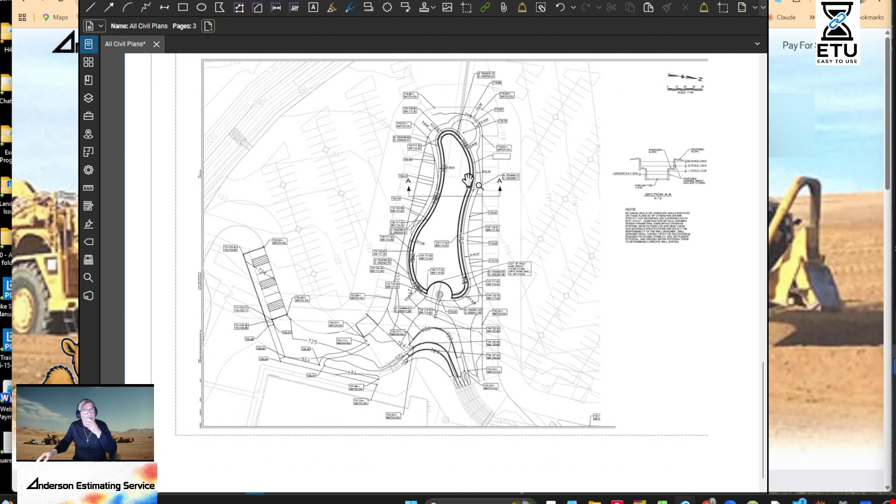We're gonna fix this stuff on the fly, but we're gonna do a little takeoff today. I've got this, and this is a little retaining wall, a double retaining wall. We don't have the structurals or anything, but we're just gonna figure it. We'll probably go 6 foot, 5 foot, and then a 1-to-1, maybe 5 foot 1-to-1, something like that. Might put a vertical in there. We'll see, we'll check it out.

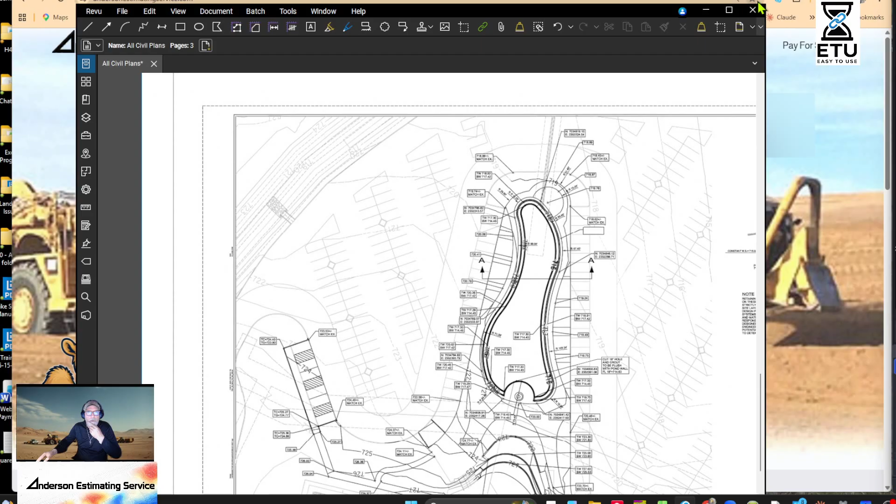And we got this sheet, and then we've got its companion. If I do it on the other side, sometimes windows, if I go up I know it's going to grab it, but if I go down it won't grab it. There we go, gosh darn it.

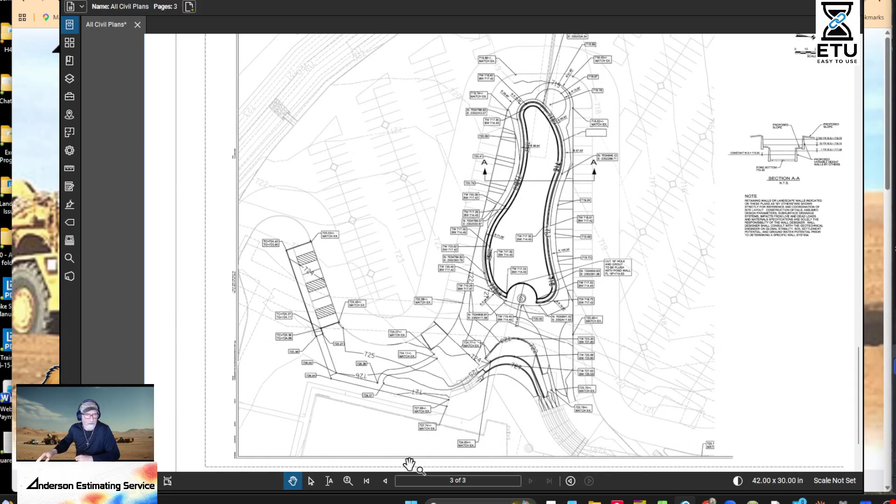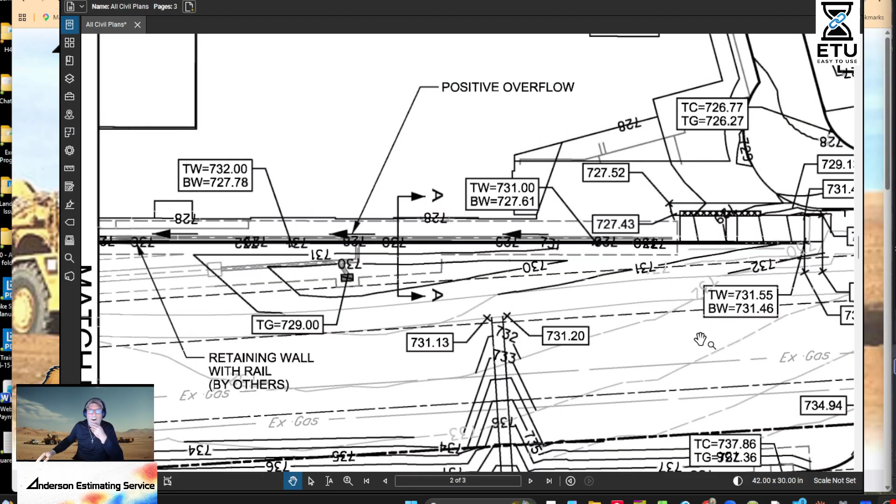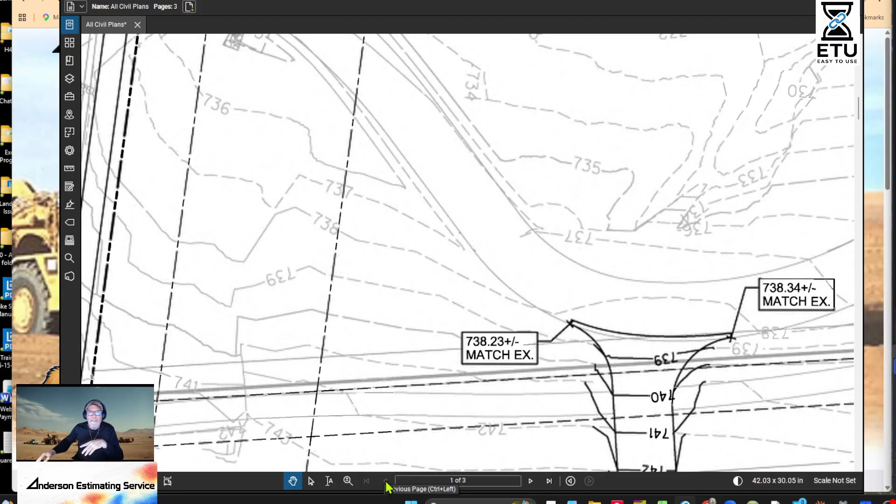So I'm trying to do this video on backfill, and I'm like, oh, I got tons of jobs, I do like 300 jobs a year, and I'm like, oh, I'll easily be able to find one. No. I had to look through - this was like, I downloaded 150 and this is like 140.

So anyways, I did find this little wall, and we'll just go through and we'll measure it. And there's a guy out there that doesn't have AGTEK, this is why we're doing this today - we're doing this all by hand. So we're taking off the AGTEK hat, and we're gonna just do this by hand.

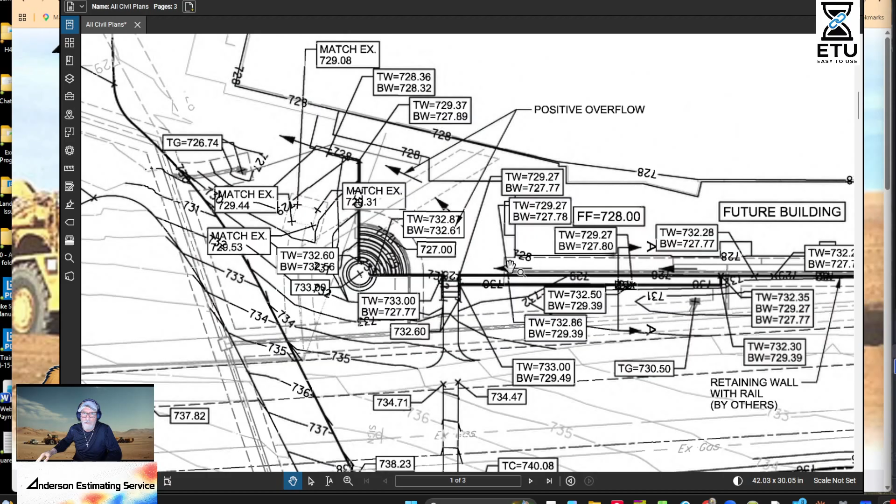So we're just gonna go over and measure it out, we're gonna get the scale. What scale are we at? 40 scale, I'm just gonna assume it's the scale. I'm gonna assume you all know how to scale a plan. Okay, obviously you would check scale.

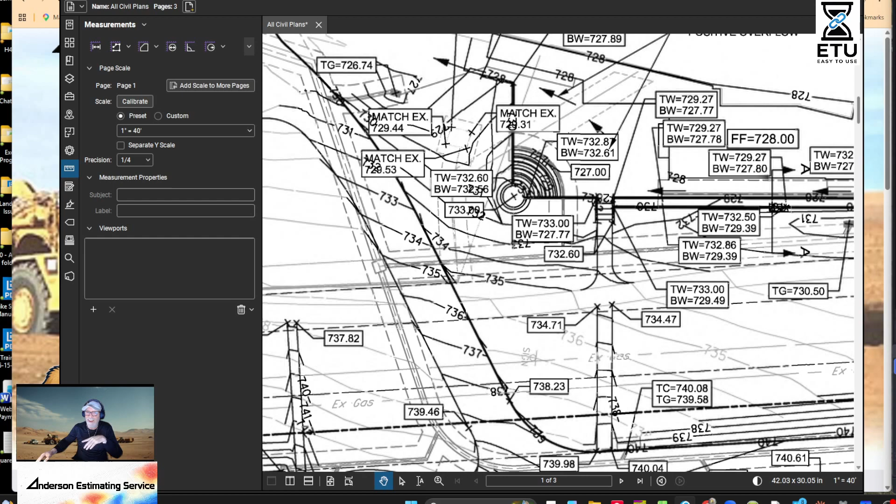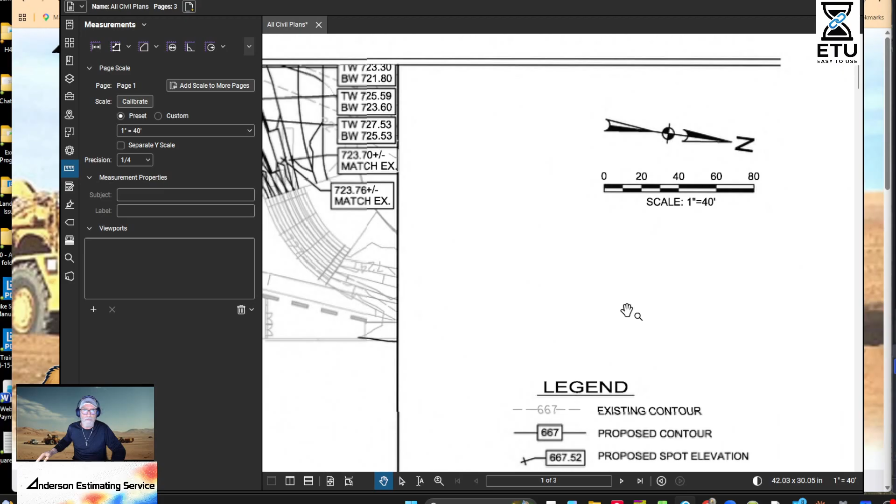Okay, here's your tip for today, here's your Hump Day tip: check scale, every time, always, never trust it. Never, ever, ever use this scale bar - not that I'm picking on Colorado, but don't use the scale bar, Colorado, you'll get in trouble. Even using these would be fine, these are 18 to 20 feet. I mean, just get a dimension plan, get something out, measure out something, and scale it off.

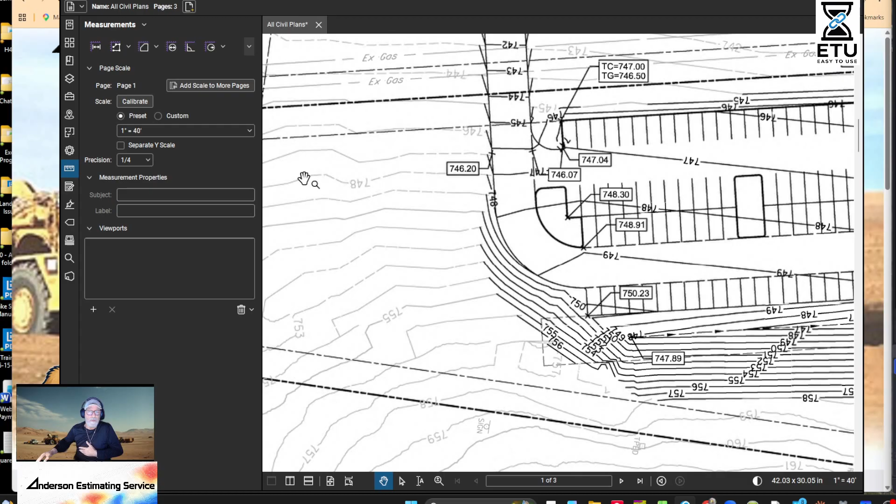We're going to keep this nice and short today, so stick around. Okay, let's get this takeoff, it's easy. So we go to, let's go get the backfill calculator, and I'm going to put that in half of this, and then we're going to measure this out first. Hold on, slow down, slow down, Alan.

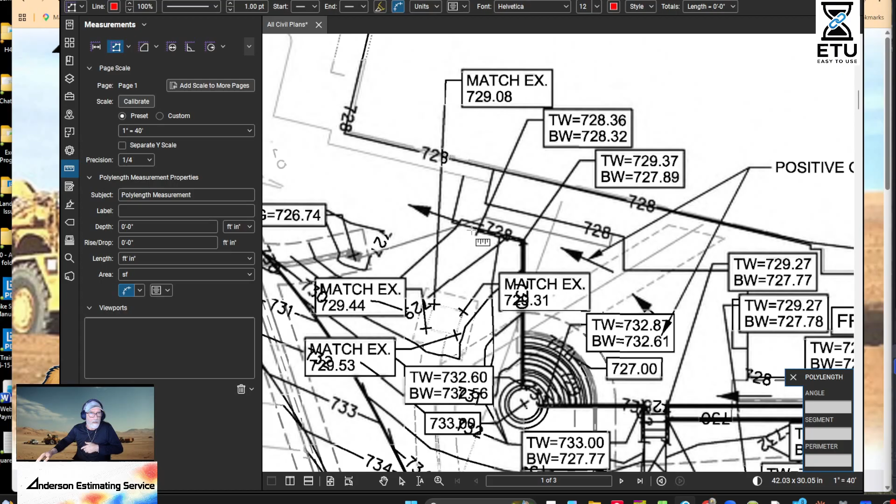All right, so we've got that, and we're going to go in and put a polyline in. Polyline, okay? And what we want on this, go to the properties - yeah, we want these segments on. Okay, so when we do this, we just go like this, put those segments. We're just going to assume that wall keeps going, I'm just trying to give you a sample. Oh, and I don't like the way it set it up with the, right?

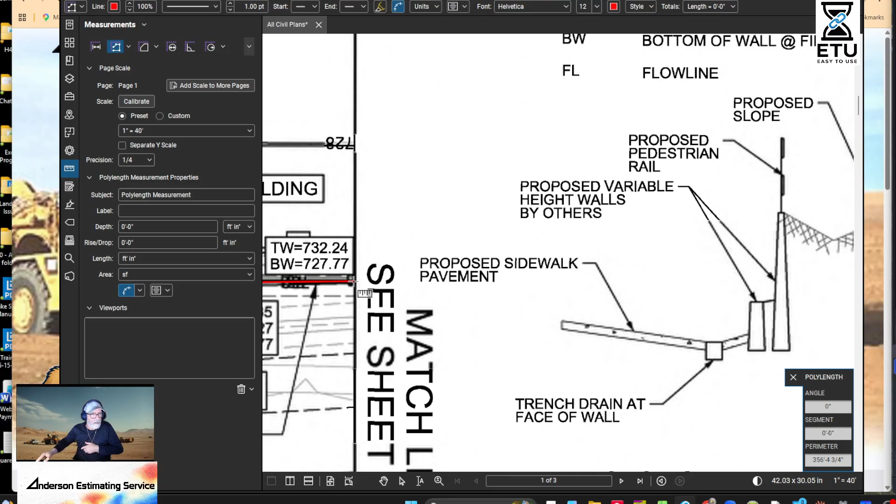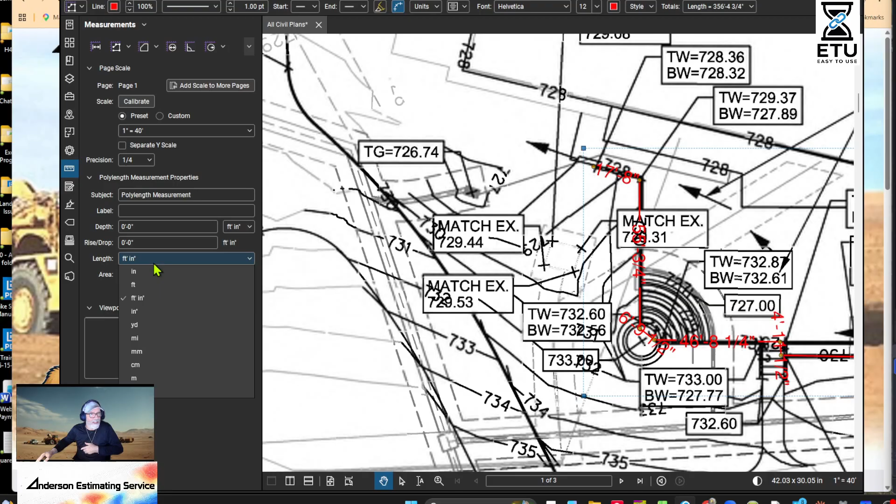Oh, and if you're an AGTEK person and you go to do Bluebeam, you want to right click the end. And so I don't like it like this, I like it in feet - do that in feet. And then who needs it that precise? I mean, yeah, I'm not measuring it that precise. How can I get numbers that precise?

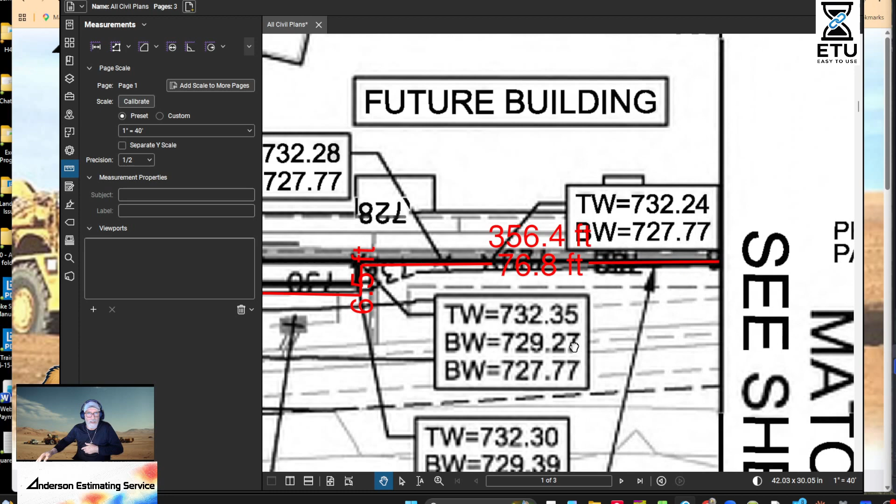Remember that problem, so this one has the total distance and then the distance at each one - that's what's kind of nice about this. So from here to here is 76.8 feet. So that way you could do this. Maybe we'll just do this one wall, and we'll go do that perimeter one on that other one. That one's easy because it's just all one wall.

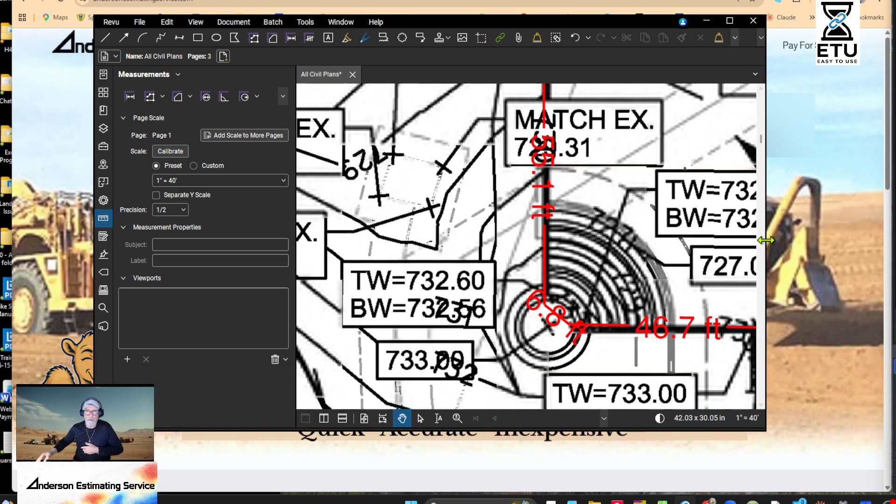So we'll just move this off to the side. And the way you close this in Bluebeam is you just click on this twice and it closes that thing.

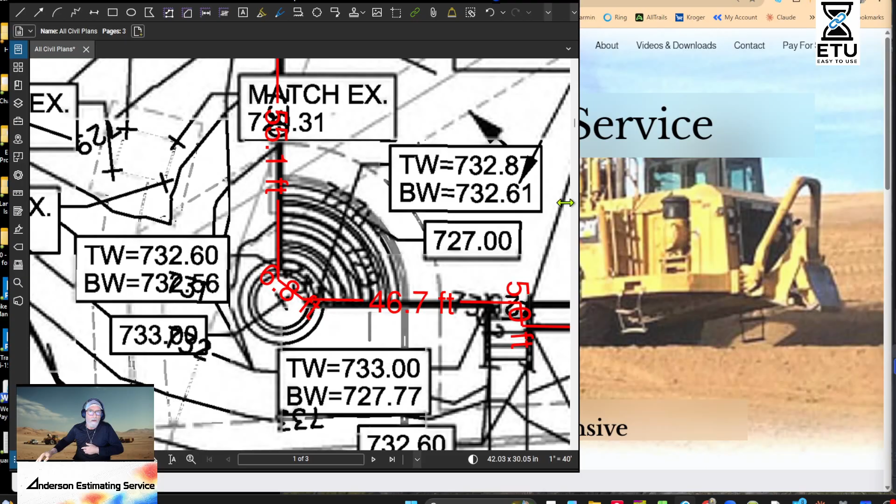So let's get this Backfill Calculator and go to the website so you can not just hear me talk about it, but see it. You can just favorite this - just go to the awesome Backfill Calculator.

Okay, and we're going to set this project up. We're going to stay with Alan, and who knows, we're in Nashville. We're in the slums of Franklin. And this is, who is doing this?

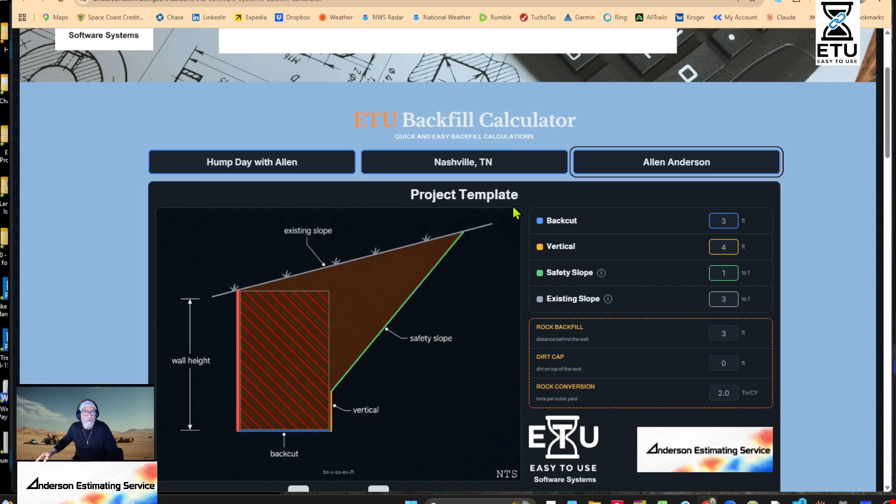All right, so typically if I was doing this I would set up a template and then just set it up. I mean your typical - come on, refresh - there we go. So your typical backfill is not with a slope, but like this, right?

You're going to have a safety slope, a vertical, and then rock or no rock. It's going to be either one like that or with no rock. So the only way to get rid of the rock is to get rid of the rock - there it is. So we're going to get the one that has these slopes.

See, down here it says back cut, vertical, and safety slope. That's all you have - a back cut, a vertical, and a safety slope. And then you'd set up your back cut.

I see a lot of you - I don't know, I'm a 3-footer because I can't fit in a 2-foot zone. Like I'd be 2 foot, no way man. So I would say set this back cut to 3. But if you want, I think you can - you got skinny guys, man, down there with the whacker, the rollers and stuff.

And then the safety slope - and then vertical, again, some places there's 0 vertical, right, and some places it's all vertical. There's no slope, it's just straight up, and that's why I have one like that. It's all vertical, right? So this is your typical one, right?

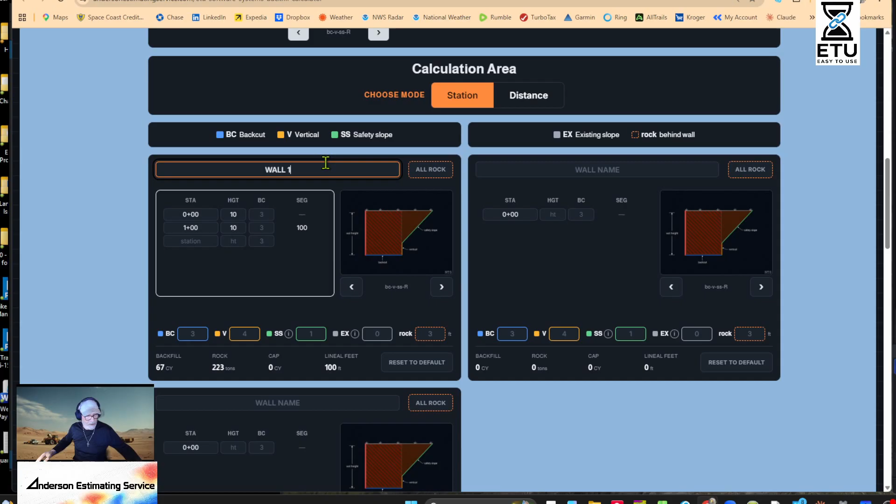Okay, so this is our template, and now we're going to go and do some backfill. And then we're going to call this... now I could save this right now. Save, and it would go somewhere.

YouTube, just go in here - I'll say Hump Day Allen, it says... there it is. So it says save. So if you went and refreshed this, okay, we just set up the template.

So if we refresh this, now it's going back to my template, so I just say load, and it's not there. You bastard, no, it's got to be - where are you? I just saved it.

See, that's what you don't do when you're... well, let's just do it. We didn't do that. See, that's why I'm trying to work out these bugs now. There we go, and we had 3 foot of rock and no existing slope too.

This will match that, and that will match that. Because if it didn't, it's going to want you to - well, that can't do it. If it's going to ask, it's going to go, wait a minute, if I went to here, it's going to say hey this doesn't match this, I'm going to adjust it.

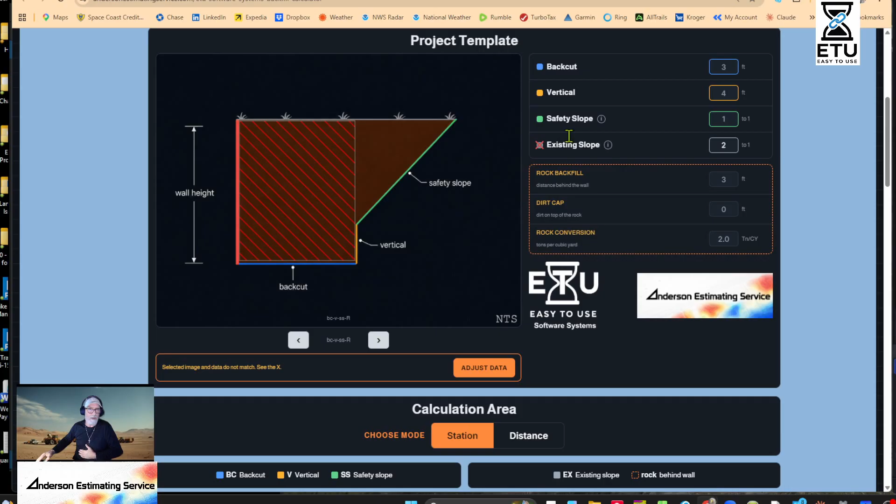Okay, let's go and do this walk over. Put that in that little corner. And I'll show you how easy this really is - watch this, once you set that up, you'll know how to do this.

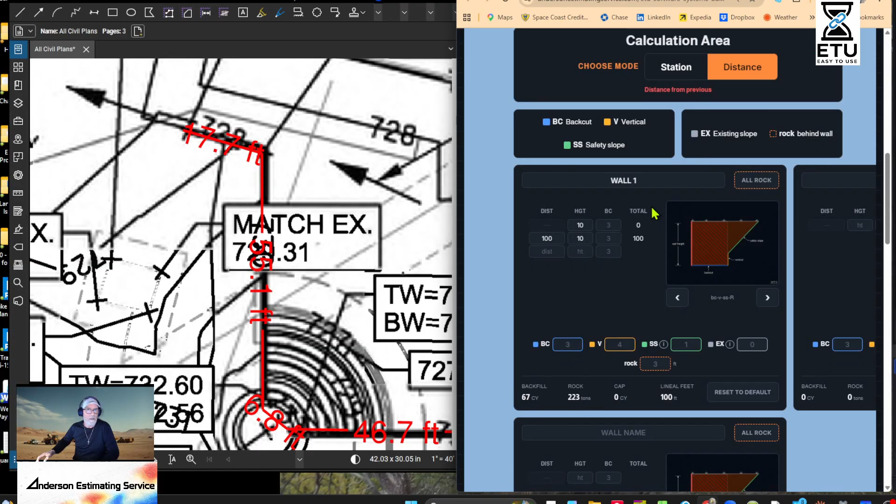Now this one we're doing by distance, right? So we go up here and we say not station, but distance. So we go distance, and we need the top of wall so we can see those - top of wall, blah blah blah.

All right, so we go distance - oh, the height on the first one is 0.04, so we're going to say height is 0. Distance, 18 feet, and the height is... I'm going to have to put a calculator in there. I can see now - see, this is why I'm going to do this.

So right now I've already said I'm going to put a calculator in there - you'll be able to push equals, and it'll let you put a calculator, put 2 numbers in and add them, subtract them. Okay, but right now we'll just say I'm just going to use the first 2, I'm just going to go 2 foot for this. And then it's 55 feet - oops, my hands are off. 55 feet, and then let's see, it's 32, so it's like a foot.

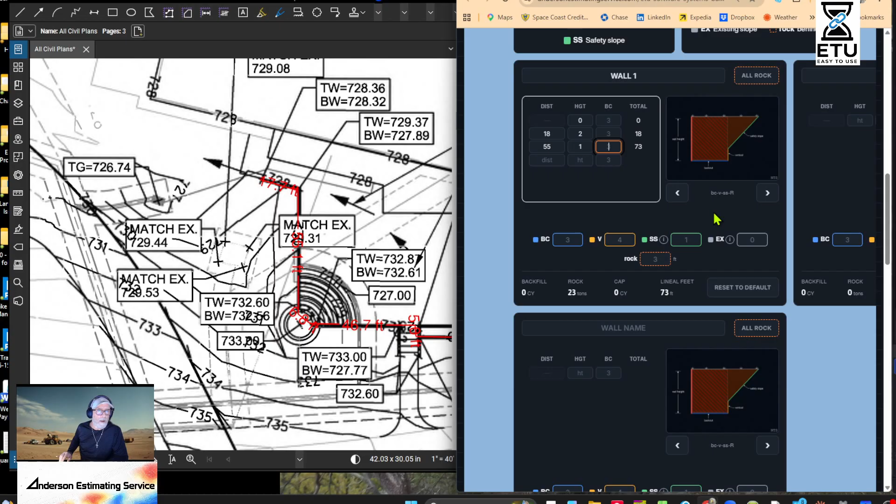Don't worry about the vertical and all that being different, it's calculating it correctly. I've got all those. We're calling this, let's call this east wall.

Number 1. And then where were we? We had 55, and then we had that little 7-footer, I'm just going to go 53 feet. Is this how you estimate? I hope so. And then it's 6 foot. There, still got that 3-foot back cut.

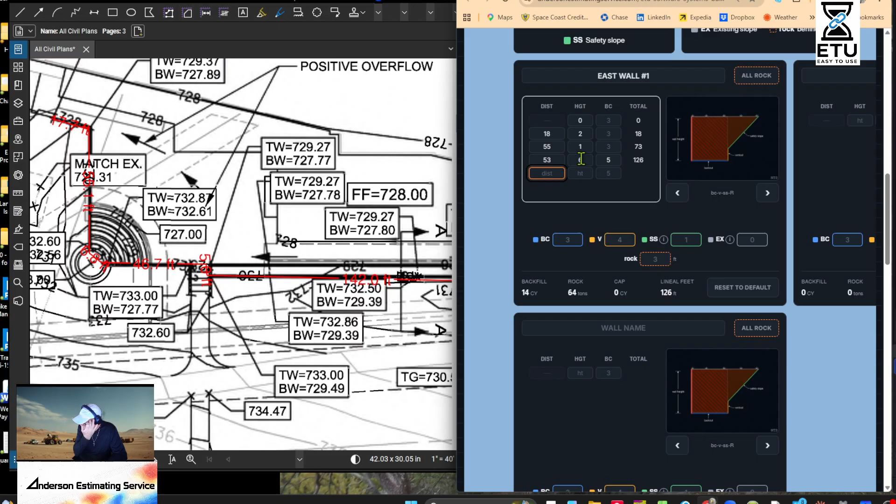Now, if you had something where you needed a bigger back cut, you could put a 5-foot back cut there. Notice it's picking the 5 foot up now, it's assuming you adjusted to a 5-foot back cut.

Okay, so we put 53, we added the 40, I added these 2 numbers together here. So we're just going to keep going. There's a 5-foot jog, and then we're just going to go 147. Let's see, 3 foot, 3 foot, they're all about 3 foot. So 42, 147 feet. And we said, I'm just going to go 6 feet.

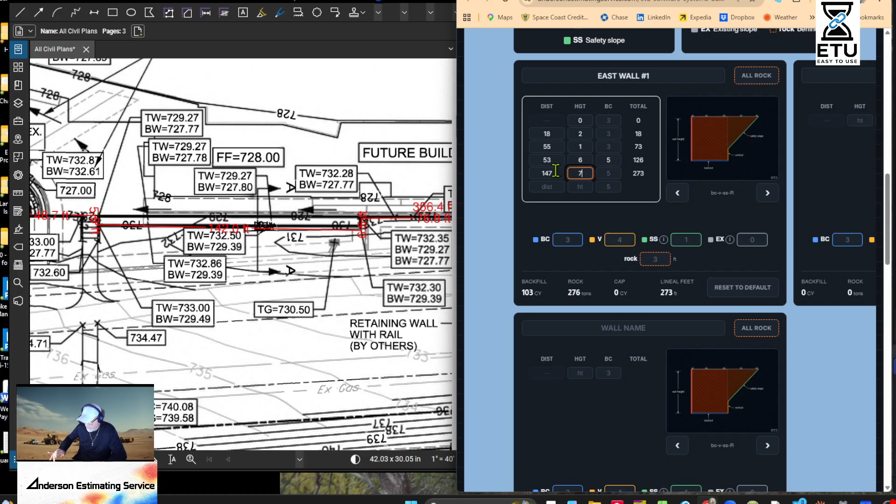7 feet, there we go. And we go back to 3-foot back cut. See how this foot works? And then this is 6-foot jog, and then it goes another 77 feet, so it's 83 feet. And can you see it? And then it's 5 foot.

Now it should equal 356, and it does. 356, the line is 356 long. What do you know? I know what I'm doing.

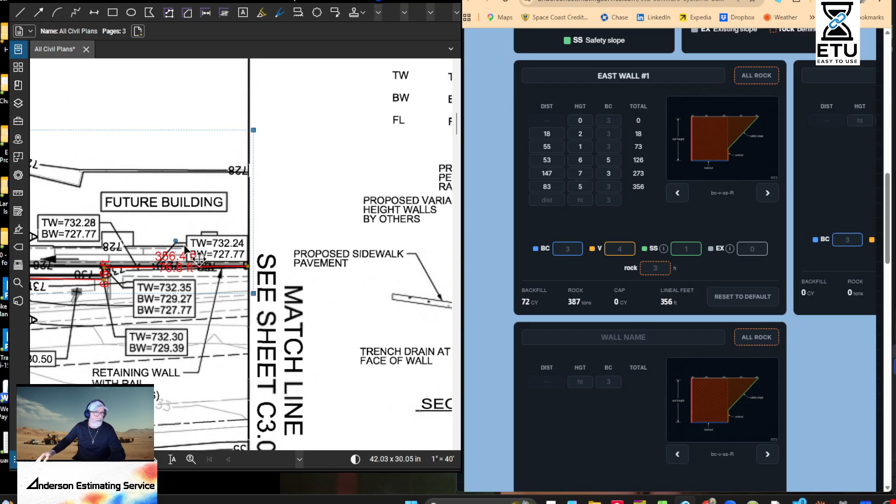All right, so let's go do the other one real quick. I told you this was just about doing takeoffs today. All right, let's get that other plan.

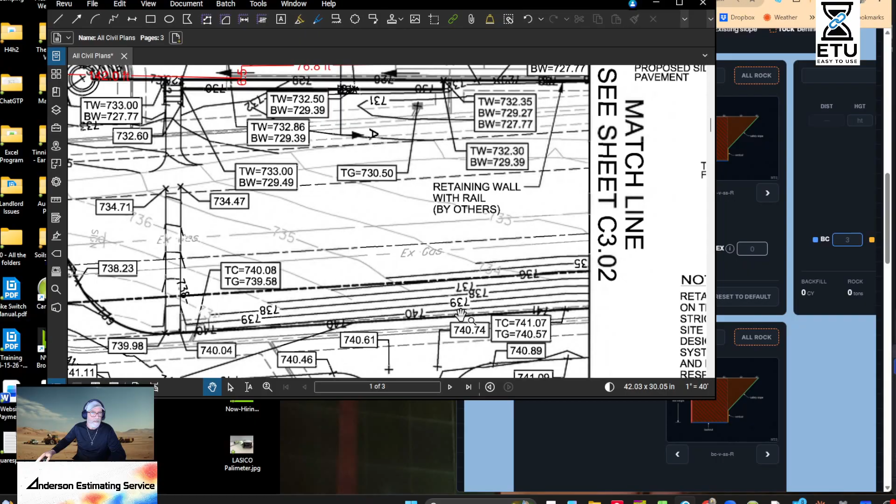Oh, it wants to grab it. Damn you, Windows. Damn you, Windows. Dead time, there it is. I just couldn't see this. All right, where is that silly thing?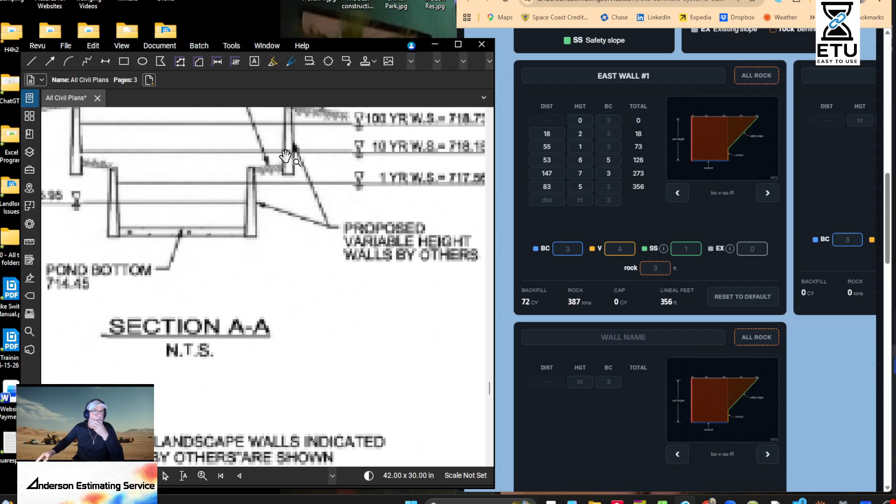So this one's easy, right? We're just gonna, this is just a perimeter because it's all the same thing, right? This is easy takeoff, so this is just the same thing. It's just, we're just going to figure, if I had the structurals, I'd really look and see where these footings lie, because this one you have to backfill, obviously, the bottom one, because there's nothing here. You see, you just, trust me.

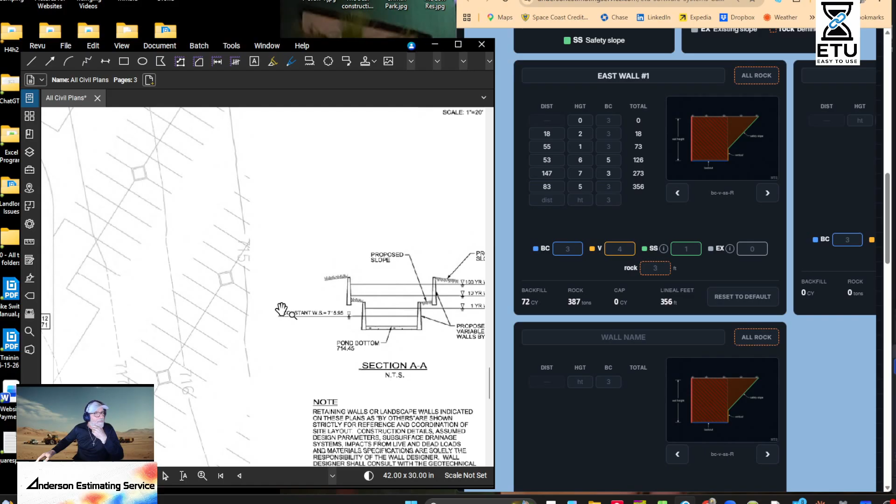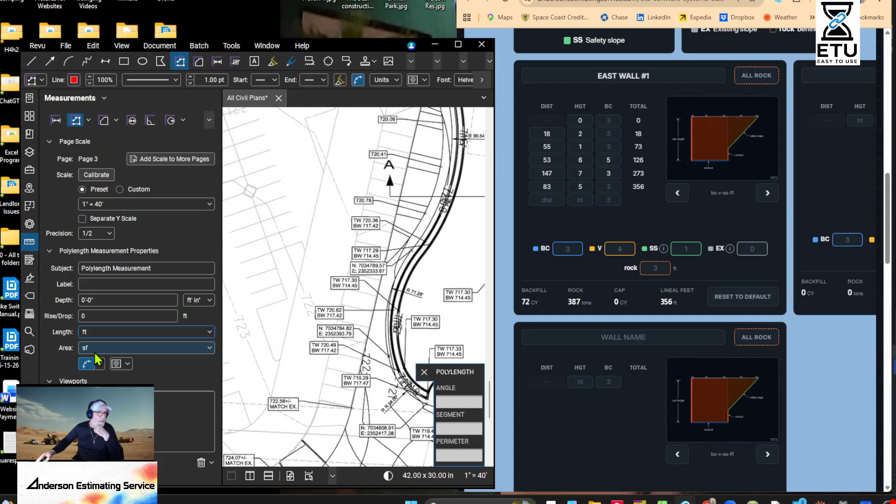Anyways, so this one I would just go in and just go, it's going to ask for scale again because each sheet is separate. Oh, I should have done them all. But let's see, custom, no, preset. Then we're going to do the precision down to a half, and then when we do these I like to do this in feet, and then we want that segments here so we can see those segments. Got it in half and we're done.

And then we could go up, you know, typically I'll do a little bar right here and just check it. Obviously this one, oh, this one is wrong. Oh wait, that's 20 scale. Okay, not a big deal.

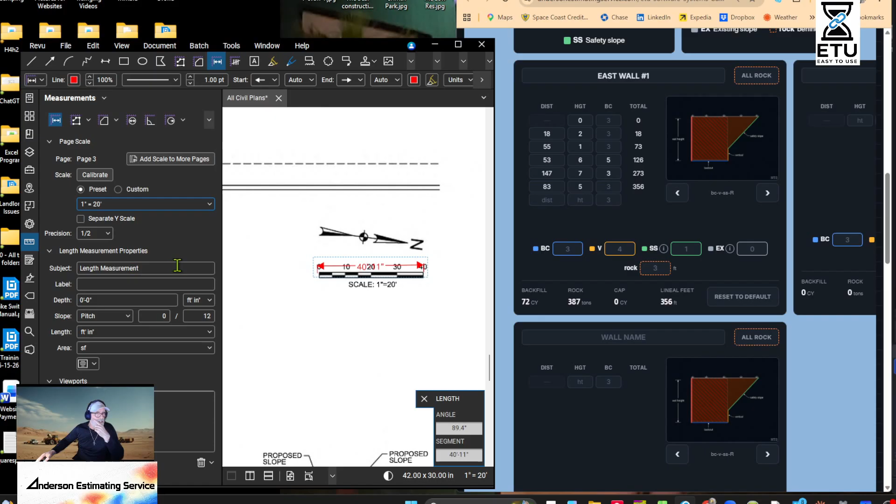That's what's nice about Bluebeam, I can just put 20 scale. I could just go back to the other one and put 20 scale, but these are all wrong. So we'll just put this one in and we'll go correct the other ones and we'll show you how to correct your data. All right.

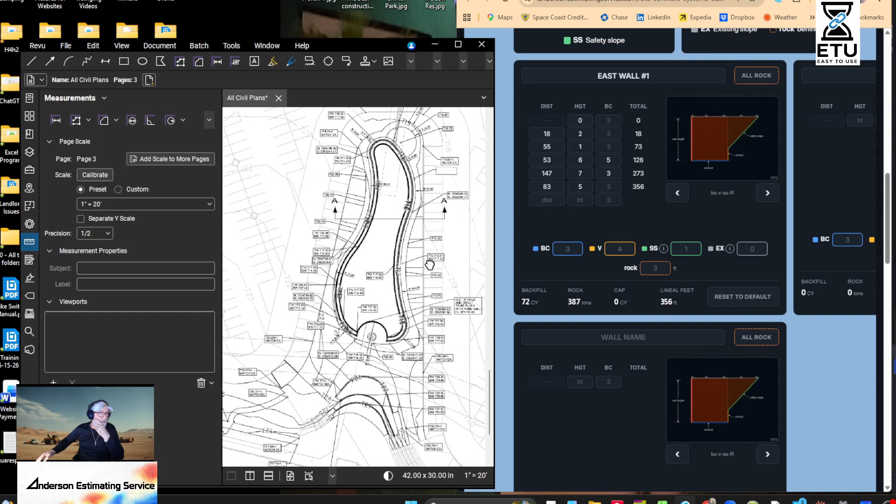So we have 20 scale now, and that says 40 feet approximately. I could sit there and mess with that all day. All right, cool. And then we go, there it is, check scale.

So we just do this and I'm just gonna, it looks like this. Yeah, I'm just gonna do that portion for right now. I mean, if I was estimating these, oh my gosh, you don't even want to know how much detail that's in.

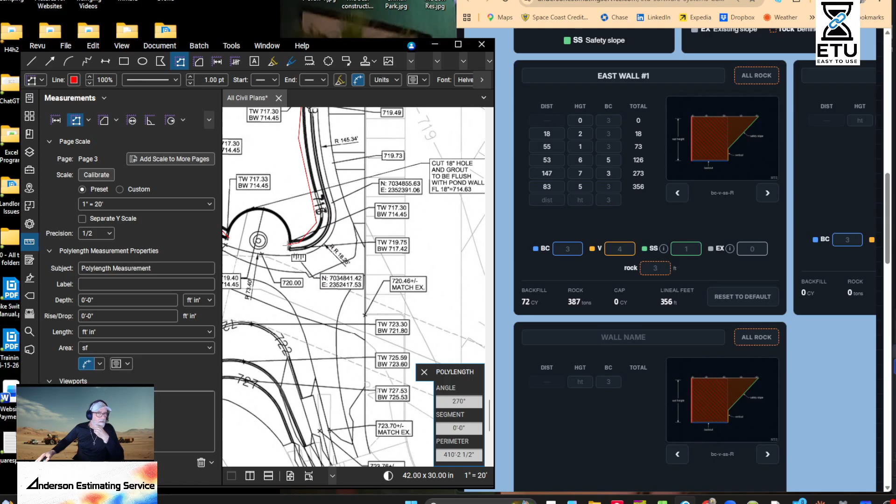You know, this one's just a total length. You don't even need these segments. You know, when you don't need the segments, you don't need them. There you go, I just need 410.

So we just go over to our wall calculator, and we're gonna go and make this bigger. Go to this other wall, and we're just gonna say pond wall. All right, and this one's gonna be a little differently.

And we're gonna have it's gonna be height. Oh, what was the height on? Oh, I'm just gonna guess. I'm just gonna, oh, calculate. Dang it, why would I guess? And there it is, top of wall, 7 foot. All right.

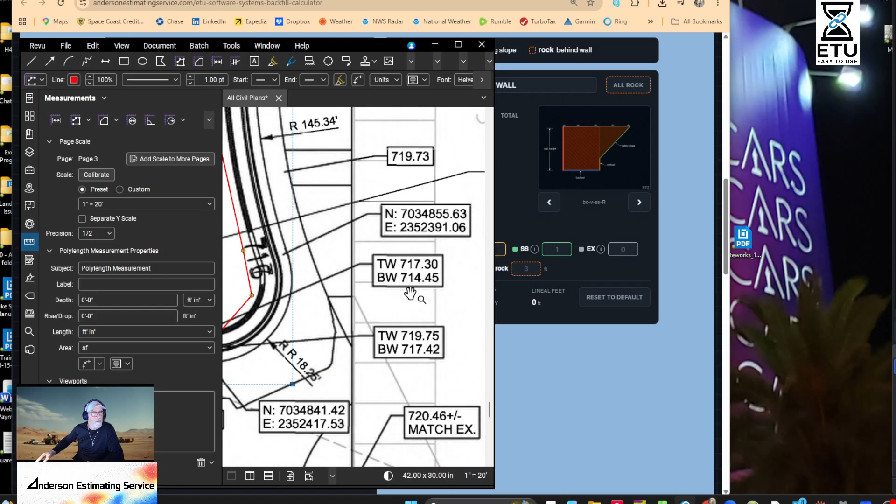So the height is 7 foot, and then we said 6 foot back cut. And you know what, this one I'm going to say there's no vertical. Okay, and we could use on-site dirt. No rock on this one. This one had rock, this one doesn't.

And then we say adjust data because we want the picture to adjust to the. You could have done it either way. And 3 foot back cut. No, we said 6 foot, that was the standard. See, this is just setting standards for here.

These things, this is the only thing you can really change. So we had 410 feet at 7 foot. There you go, there's your volumes. And then over here, there's your backfill. There's your rock and your linear feet. So your rock plus your backfill is your excavation. Okay.

And I can see it. So we need to put... see, that's the fun thing about this, is I get to debug.

Why free? Well, I wrote a program and I use it, and there's no competitive advantage. I'm just a consultant, I'm not bidding stuff. Just sitting in my little place in Franklin, drinking coffee, doing takeoffs for my select friends. I call them friends, my customers. I hope to work with them rather than for them. I like working with people, not for people.